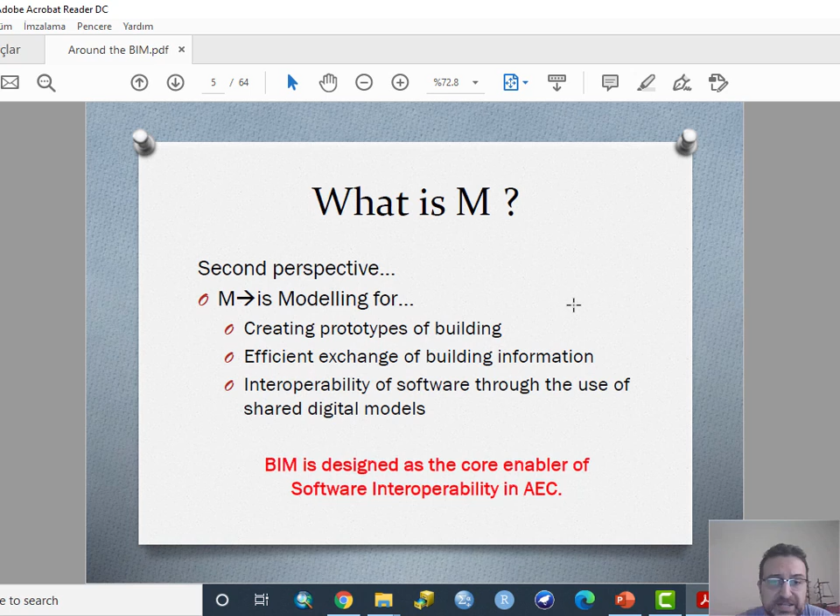Okay, let's conclude this brief introduction to BIM with a summary. Building information modeling can be defined as management of building information. If we define it as a process, we can define building information modeling as management of building information through the utilization of shared digital building models, which are unique per building.

So BIM can be defined as this information management process, but this process should make use of unique digital building models, or digital prototypes, or digital twins of the buildings, which are unique for every building.

We can call an instance of this unique digital model the BIM, the Building Information Model. Both acronyms are the same, BIM. We can call the information management strategy Building Information Modeling - this is also BIM. So there's a single acronym defining two different things: first, the model, an agreed formal structure, an information model; the other, a process, a way of doing things using a formalized model. Both concepts are called building information model or modeling, but BIM.

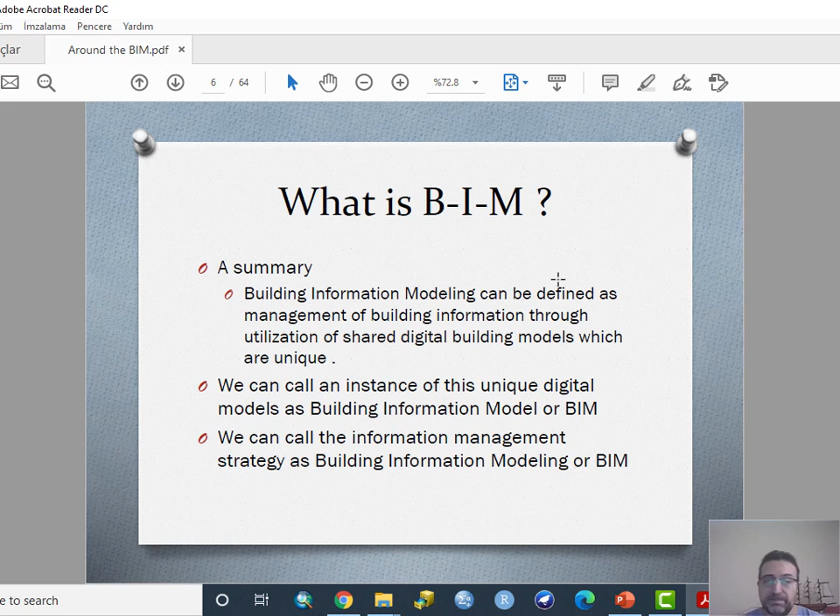Okay, let's move on to the next session now. We checked BIM as a model that enables software interoperability. Let's focus on the model side. BIM is a model that enables interoperability. So why is BIM different? Why is BIM special? What makes BIM a BIM, if you like?

So we have the pre-BIM era. Actually there's an even earlier era, the pre-CAD era, and then we moved from the pre-CAD era to the pre-BIM era. Let's speak briefly about the pre-CAD era. In pre-CAD era, we were drawing by hand, by pen and paper. That's it. With the advent of computing and developments in processing speeds, screen technologies, input technologies, and all those sorts of things...

...CAD became possible. The keyword is also interesting - CAD, computer-aided design. Once we dive into the CAD world, we accept that computers are aiding us, helping us in design, in structural analysis, in cost calculations, and all sorts of stuff. Today, computers are helping us in every aspect of the AEC domain.

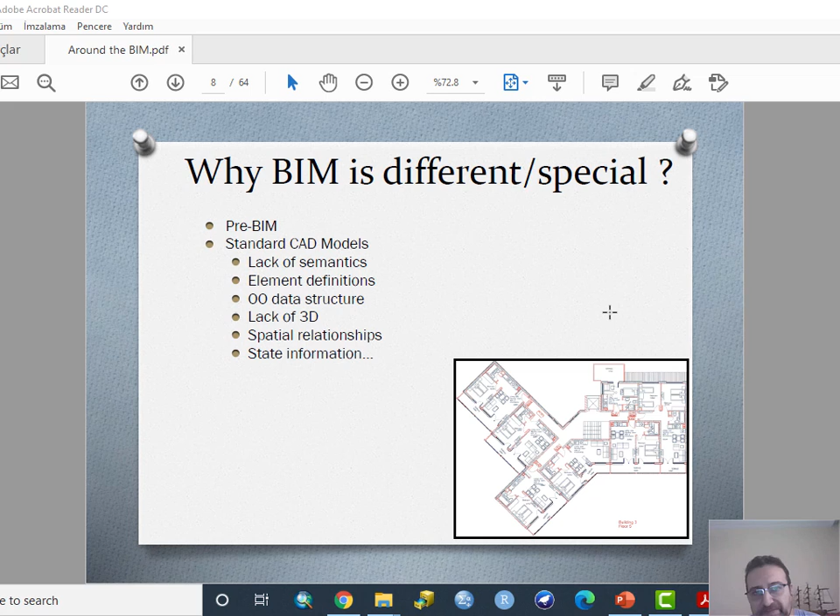So the BIM is special. BIM is a more elegant solution to information management than CAD, and it represents the building in a much more information-oriented manner when compared with CAD, computer-aided design models.

So how can we differentiate BIM from other digital building models, other CAD models, or any other digital building model? There are some principles here. First is the object orientation principle - the data structure of the model is developed based on the object orientation paradigm. If you know a bit about software engineering and object orientation, you can easily understand this concept. The structure of represented information is object-oriented.

So if you're modeling a wall, it's modeled as if it's a real object. I don't want to deep dive too much into this because it's more of a software engineering oriented subject. The second item is being comprehensive.

The models are data rich, information rich, and comprehensive in terms of geometry and semantics. In terms of geometry, the model elements are very, very detailed - they can represent a door, window, or even indoor furniture. When you check a BIM, you'll see how detailed all the elements are modeled and represented.

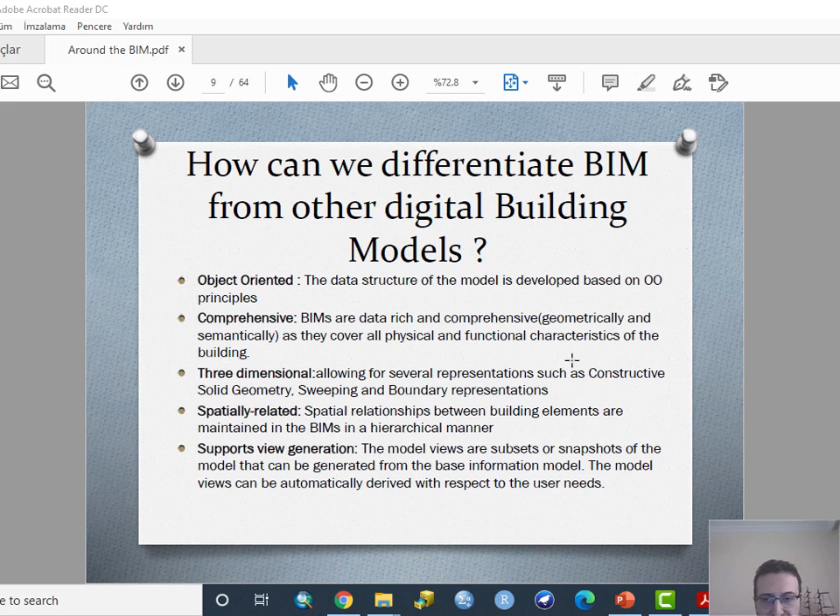Okay, so BIM, the building information model, is an evolving model. BIM is shared between the project stakeholders and the owner through the entire life cycle of the building. So the principle behind the building information model is sharing.

Since the concept design, starting from the first sketch of the architect, the information should be shared between all stakeholders—the owner, the architect, the consultant, the contractor, everybody. So we should share the information starting from the first idea until the demolition of the building. This sharing philosophy should also continue while people are living in the building.

So in this approach, the building information model, the actual information storage, BIM, acts as the information backbone or DNA of a construction project.

So BIM enables applications to be easily integrated into the process. The applications come and go. The model is constant. The model is our, let's say, landmark. The model is there. The applications come into the process, do their job, and go out. Application A comes, does its job, goes out. Application B comes, does its job, goes out.

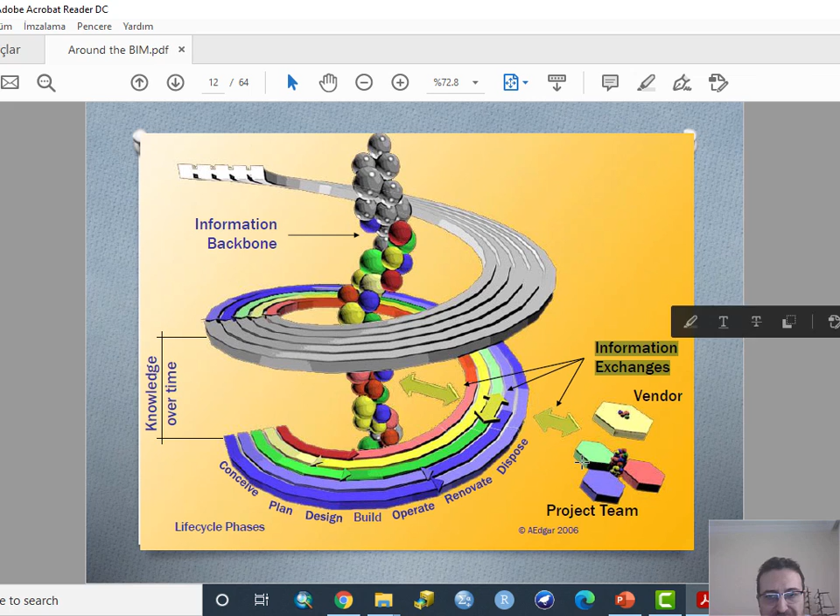So the principle is maintaining a central product model, central information model, which represents everything, every bit and piece of information in the design process, in the construction process. All these information are stored in this model, and all these different types of software can import and export information from the model. So they can import information, use this information, process this information, and export newly generated information to this organized storage. So this is the organized storage, the product model, the BIM.

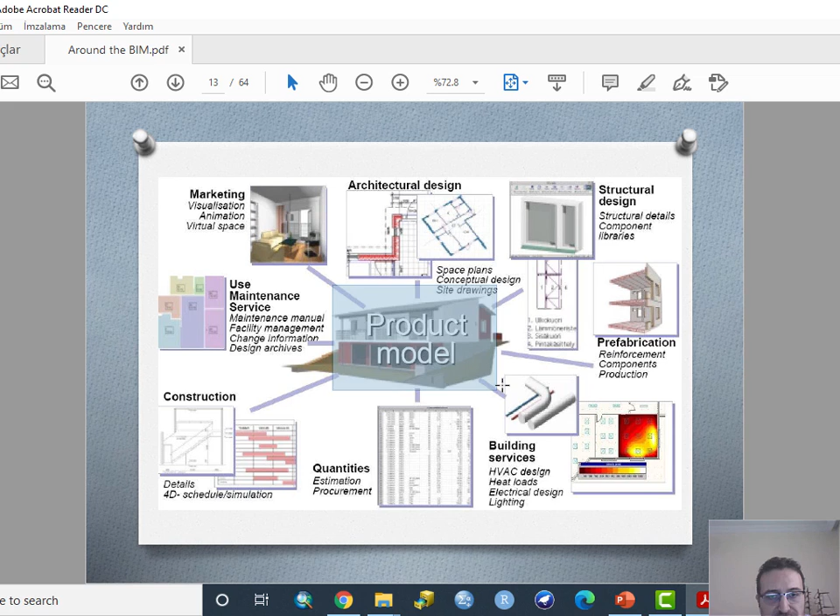I was talking about the views. So many different parties want to view BIM from their own perspective.

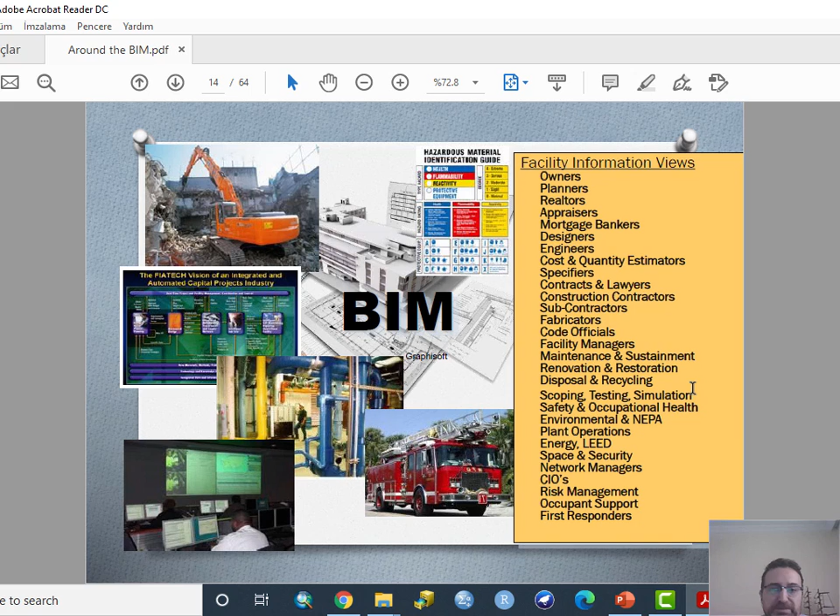These include the owners, planners, realtors, appraisers, mortgage bankers, designers, engineers, cost and quantity estimators, specifiers, lawyers, contractors, subcontractors, fabricators, when we say offsite manufacturing, code officials, facility managers, maintenance people, renovation, building managers, facility managers, disposal, recycling, environmental, plant operations, energy-related operations, LEED, BREEAM, and space security network managers, CIOs, risk management people, occupant support, and also emergency responders. So there are really many different people who are interested in the BIM.

What can BIM include? So this is another interesting topic. Once we are saying what can BIM include, we should note that we don't say BIM must include this. It can include.

BIM can include site information, architectural program, floor plans, space functions, classified areas, area calculations, volumes, engineering calculation results, specifications, contract documents can be integrated into BIM. So, for example, integration of this requires the integration of document management software with BIM.

This is also the same. Legal descriptions, change orders, supporting documentation for litigation, shop drawings, procurement documents, progress photographs. So these can also be integrated with BIM.

Alarm diagrams, warranty data of any object inside the building, invoices, purchase requests, cost estimates, organizational occupants, personnel list, seating plans, handicap designation, network diagrams, hazardous materials, operating manuals of many devices inside the building, maintenance records, inspection records in the FM stage, facility management stage, electronic 3D model of the building, simulations, continuity of operations plan.

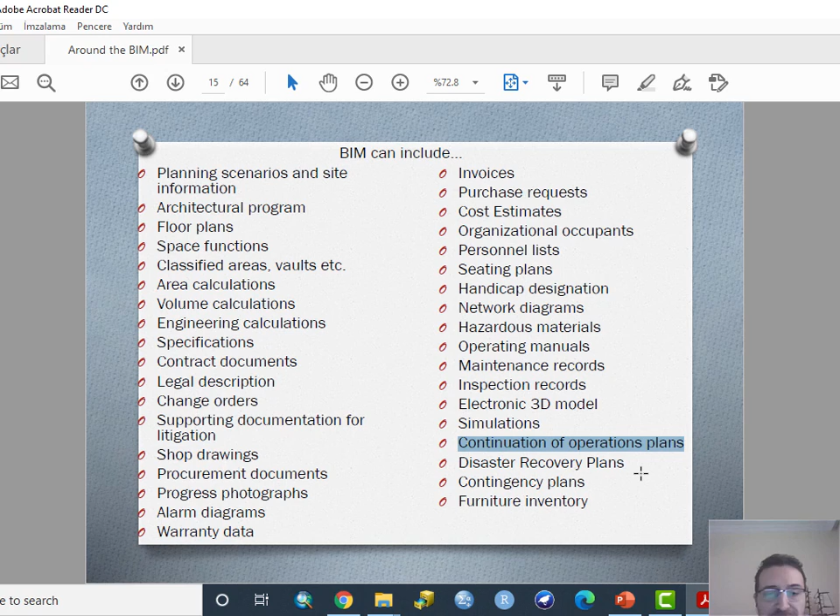So BIM is not an asset only for design and construction, but it's an important and key asset for building management, for facility management, for operation stage. While we are living in the building, while we are traveling from the airport, the asset is there. BIM is a digital asset, and it is very important.

So this is a disaster recovery plan. If there is a fire in the building, if there is a flood, you can use BIM to actually plan or manage the emergency operation, contingency plans, and furniture inventory. So this list can be extended as well. There are other things that can be added to this list. So BIM can include many things.

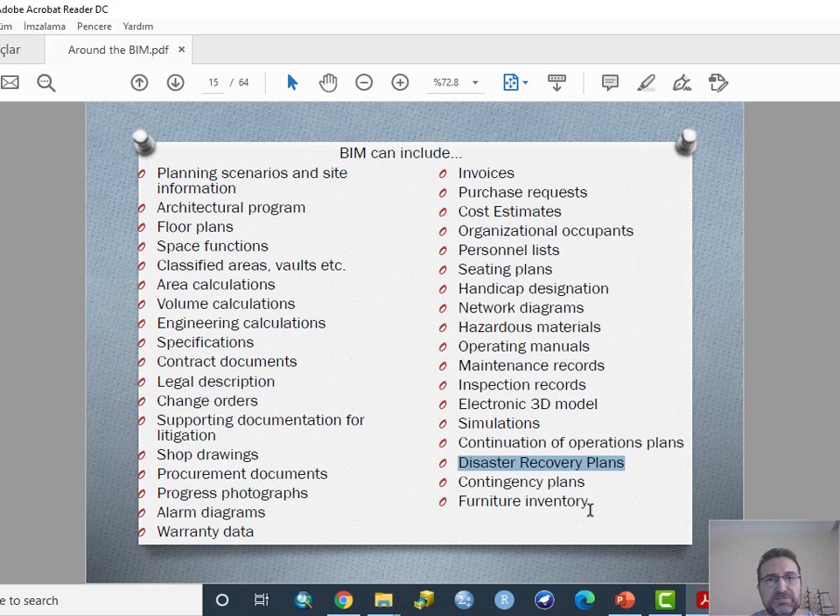So BIM is important in the design phase to enable more coordinated design. BIM is important in the construction phase to check everything is going on program and everything is proceeded as planned. And BIM is important in the operation stage to check the building is operated normally. So at every different stage of the life cycle, BIM is important.

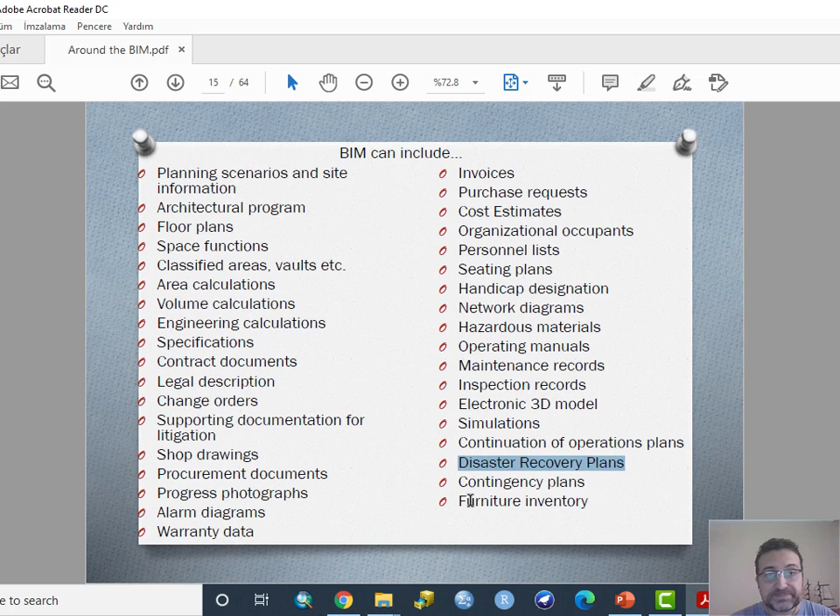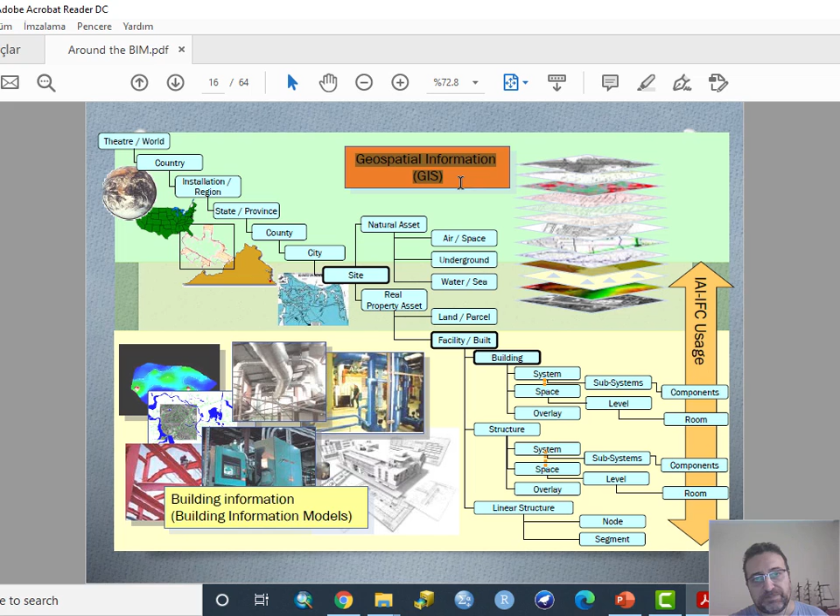There's also another dimension. This dimension can be named as city information management today. It's called CIM, City Information Modeling and Management. And once you go up in the city level, these building information models, these digital representations of buildings, become the elements of a digital city. So digital city contains digital buildings. So the information on the digital buildings would and can be updated from the BIMs. So this is the key principle behind BIM and GIS integration. This is also a popular topic for the last 10, 15 years.

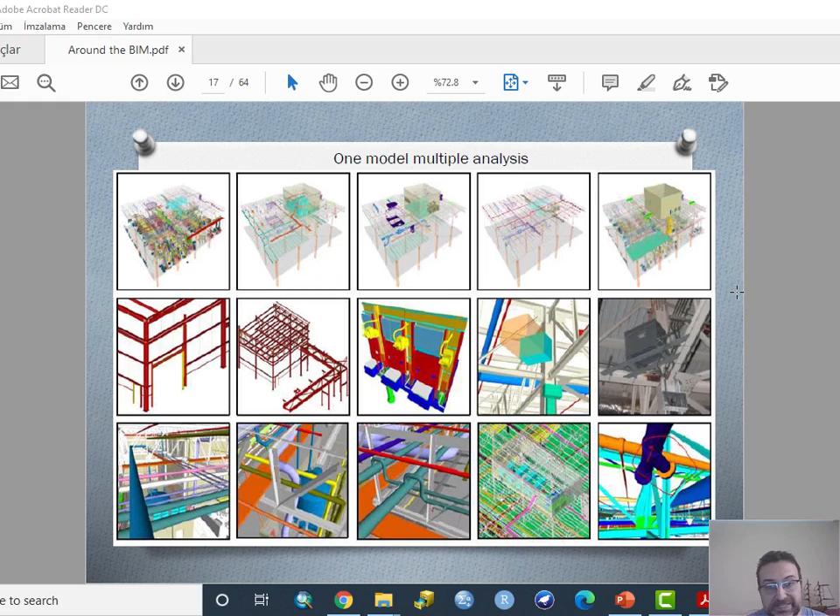In BIM, a model supports multiple analysis. So when you're using a BIM, you can do HVAC analysis, you can do structural analysis, you can do analysis related to architectural planning, and so on and so forth. So BIM can be used for many different analysis types. Let's move on to another subject.

It's called management of a project, information management of a project using BIM, and we have to do some planning. This planning is called BIM execution planning. It tells us how to manage the BIM process, or how to manage information management processes using BIM. So this is called BIM project execution planning.

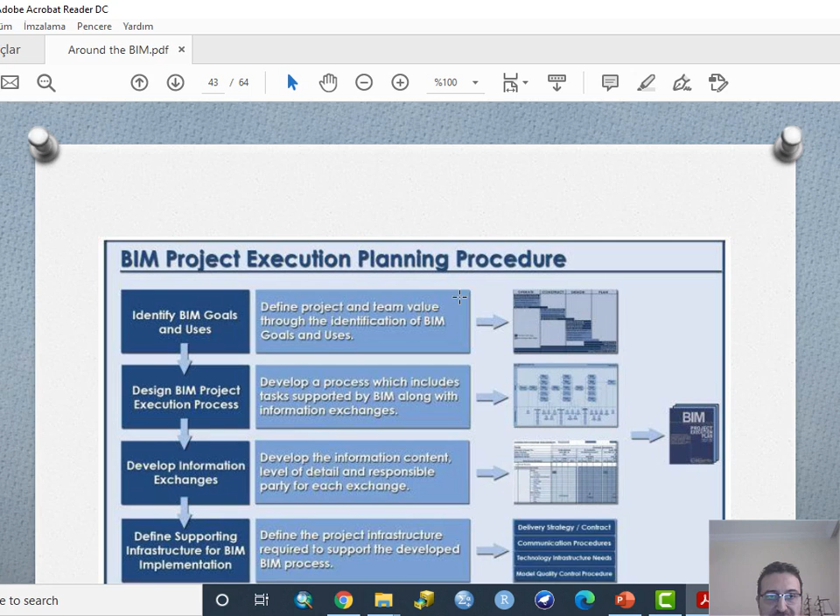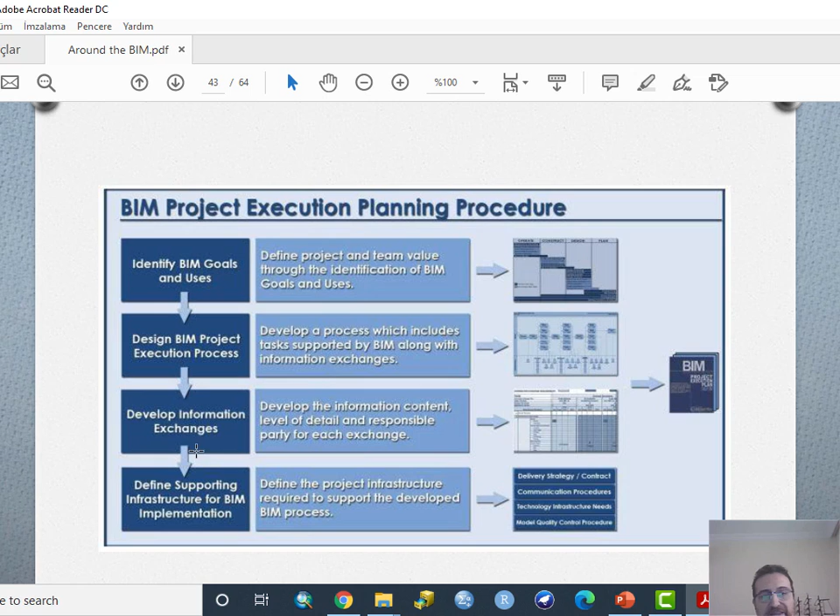Once you have decided to use BIM, you have to do a project execution planning. This involves several steps. First, identify the BIM goals and uses. Then design the BIM project execution process. You have to develop your information exchanges, and define a supporting infrastructure for BIM implementation.

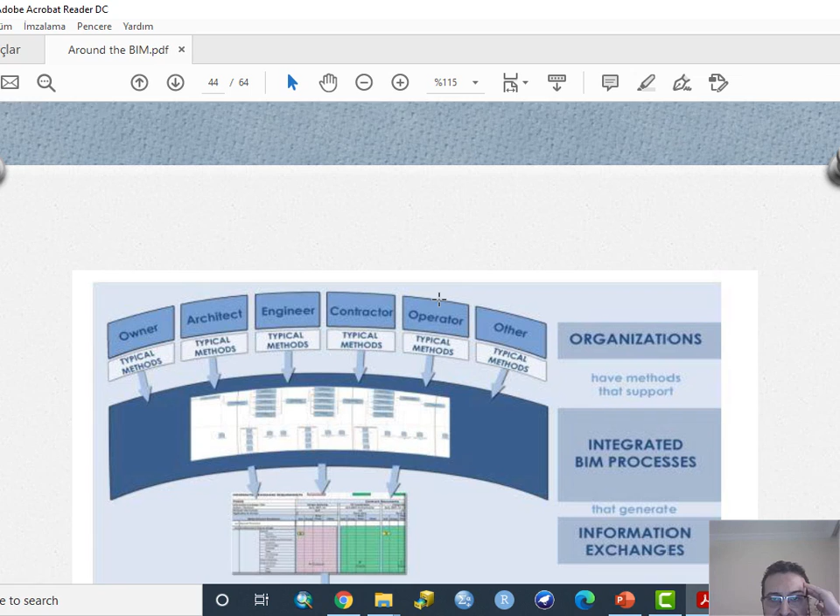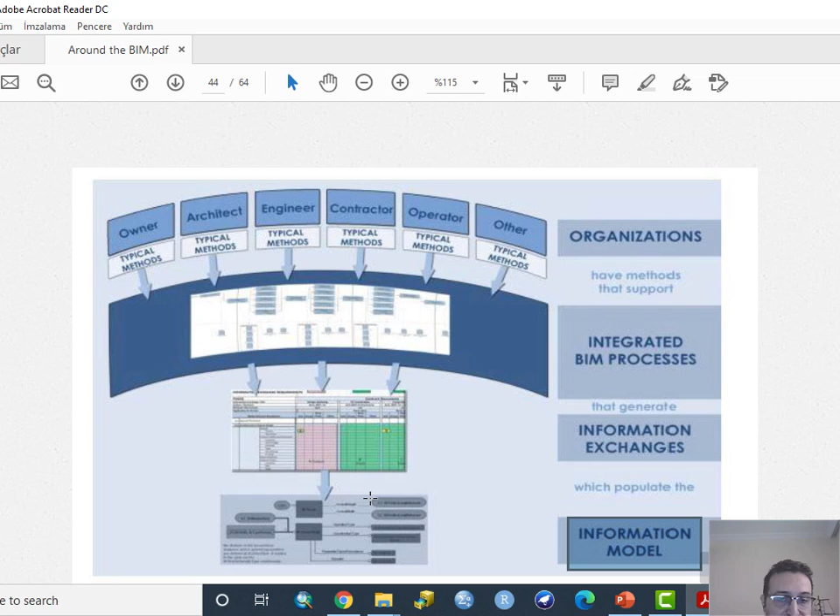BIM happens between organizations such as the owner, the architect, the engineer, the contractor, and operator. Integrated BIM processes generate information exchanges. The resource I'm using is Penn State's BIM execution planning guide, which tells us that integrated processes generate information exchange, and we have to formalize the processes, the information exchanges, and the information model, which is the BIM itself.

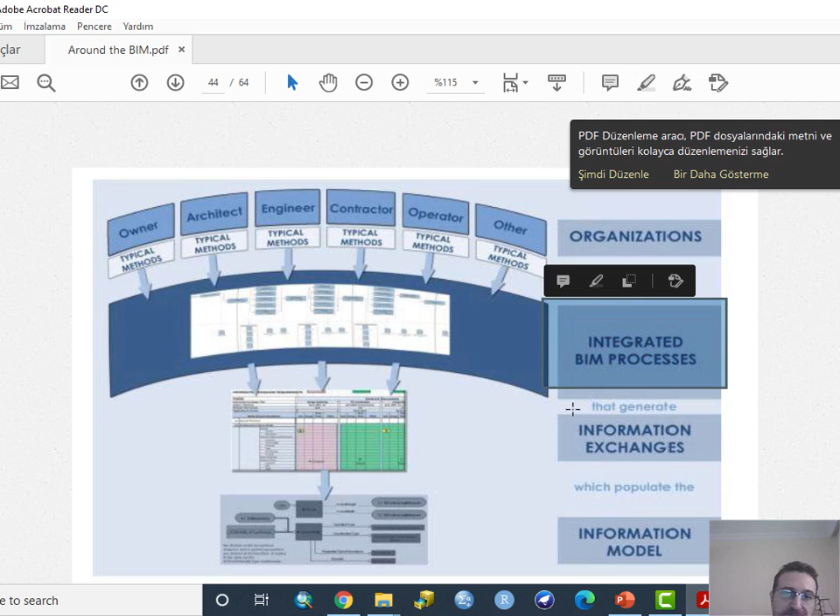We have to formalize the information exchanges and integrated BIM processes, and let organizations know about it. All this process is called BIM execution planning.

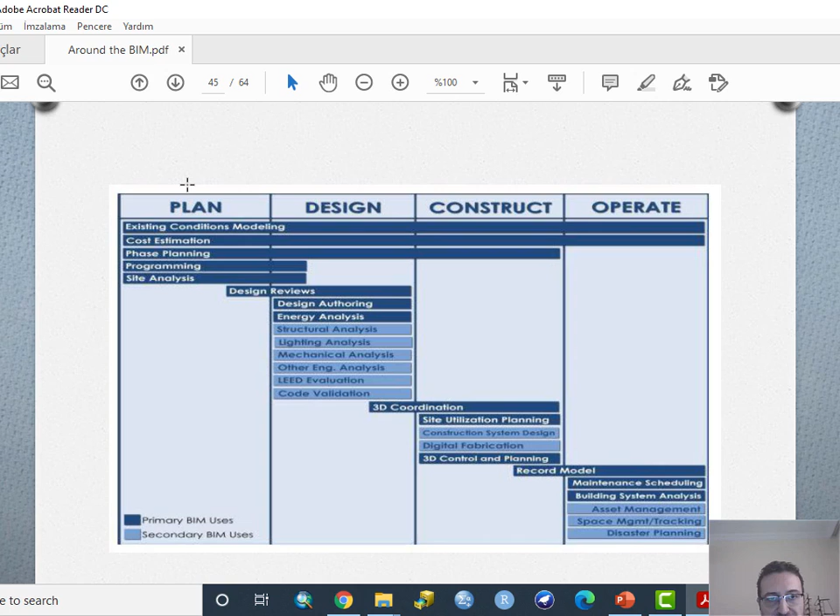There are several stages of the construction life cycle or building life cycle. The key stages are planning, designing, constructing, and operating the building. There are several sub-stages, or jobs to be completed in each stage. Some span into all stages, such as cost estimation, phase planning, site analysis, design authoring, energy analysis.

All these different aspects or job groups require different utilization of BIM. If you're doing design authoring, you have to utilize it in a way to support your design authoring. If you're doing energy analysis, you have to utilize BIM in order to support your energy analysis.

If you're on the construction side, and doing 3D control and 3D planning, you have to utilize BIM to help with that. If you're doing asset management or space management, you have to utilize BIM to help in space management. So you have to plan all these uses of BIM.

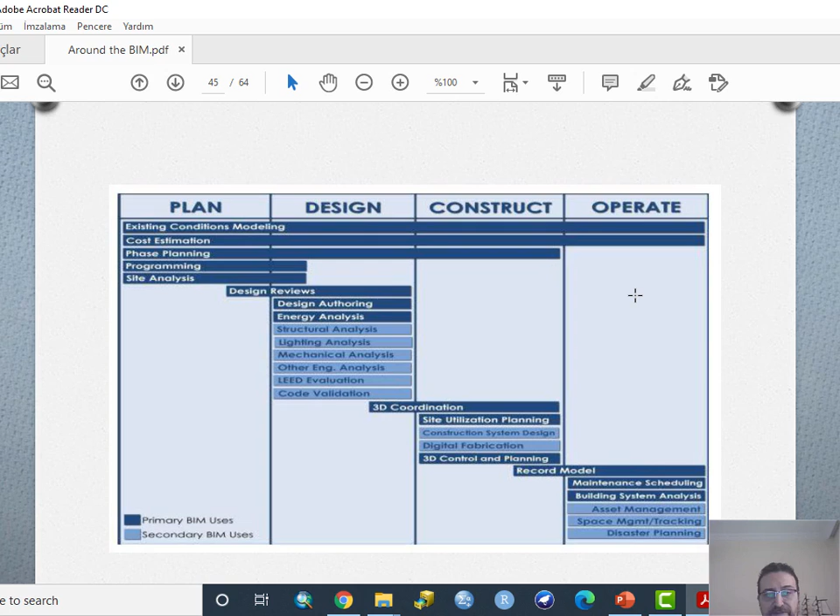Depending on your use, you have to make an organized plan on how to use BIM for that specific aspect. For example, how you will use BIM for design authoring, for energy analysis, for structural analysis, for 3D control, and for asset management. All these plans are called BIM uses.

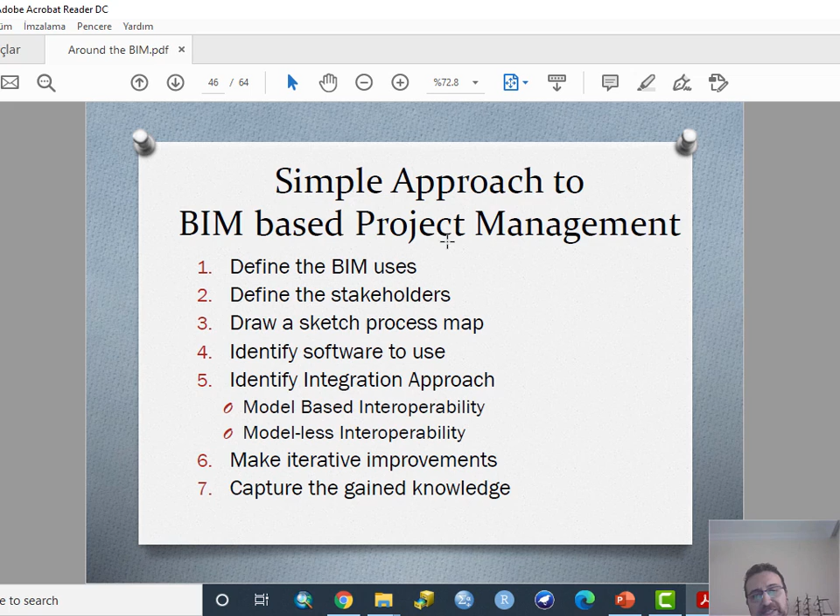A simple approach to BIM-based project management is this: first, define the BIM uses. Second, define the stakeholders, and draw a sketch process map. Identify which software to use. Identify your integration approach — is it model-based interoperability or model-less interoperability, meaning interoperability through the use of BIM software but not the model. Make iterative improvements and capture the gained knowledge.

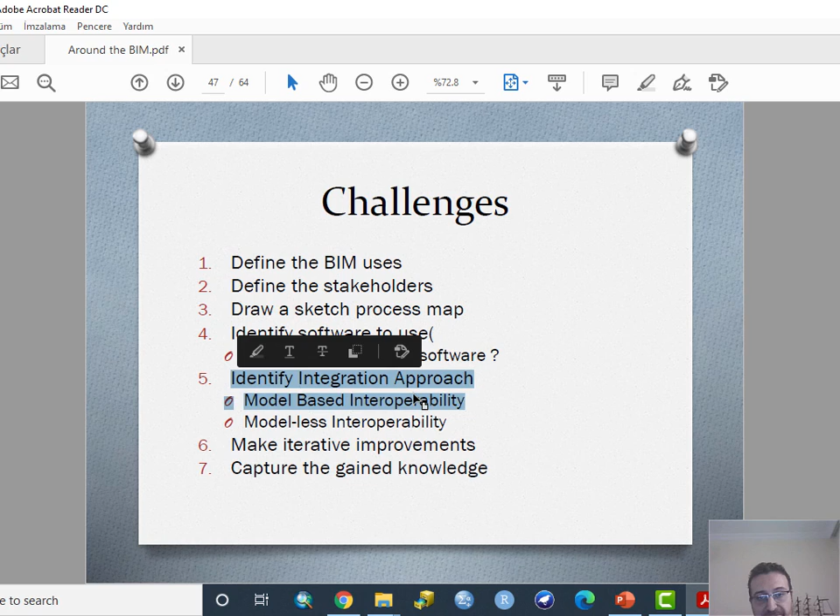There are challenges in each step — in defining BIM uses, in defining stakeholders. Process mapping requires trained people in your organization to define a really good process map. What software to use, which integration approach to choose, how to complete iterative improvements, and in which system to capture knowledge again — there are challenges now in every step.

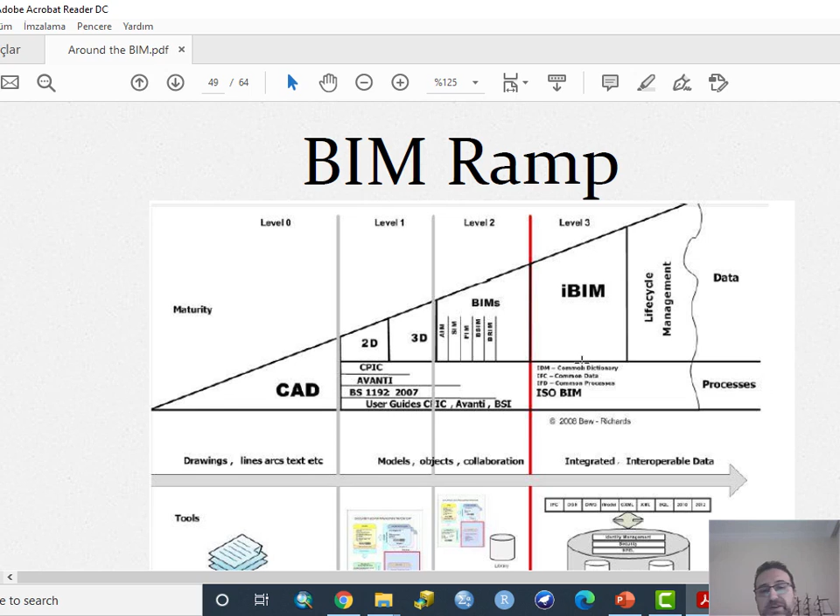Although we're able to manage all those issues within our organization, it's also important to have adoption. From Bew and Richards, 2008 to 2020, organizations should find their place in this evolutionary chart — from the CAD era, they should move into Level 1 BIM, Level 2 BIM, Level 3 BIM, and they should have a process of learning on how to adapt to them.

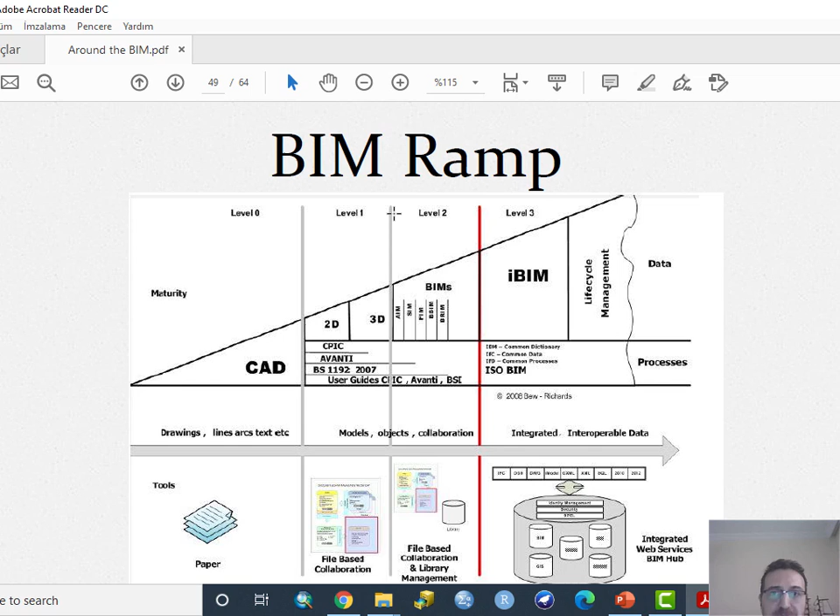So these are the key important concepts that can be mentioned as a starting point to BIM.